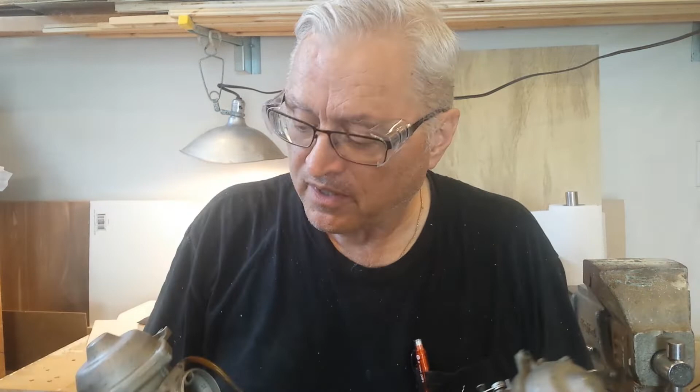As you may have guessed from the title, I'm going to tear into these Bing carburetors off of my Rotax 912. They're due. I think Rotax has had problems with floats sinking. These aren't supposed to be the floats that were in the service bulletins, but I'm seeing some fuel staining and stuff, and plugs on one bank are a little black, so it's time.

And since I have a background in carburation, I thought I'd take the time to walk through how these carbs work, what the various pieces do, why somebody might do it that way, and as I tear it apart and see what I find. So there's going to be a lot of talking, so if that's not what you want, then sorry.

But I should also say that I'm not an A&P. I don't have any Rotax specific training, certification, anything like that. I'm just a dumb old mechanical engineer who used to do a lot of emissions work in the auto industry back in the olden days when cars really had carburetors. So with that, let's zoom in and get started.

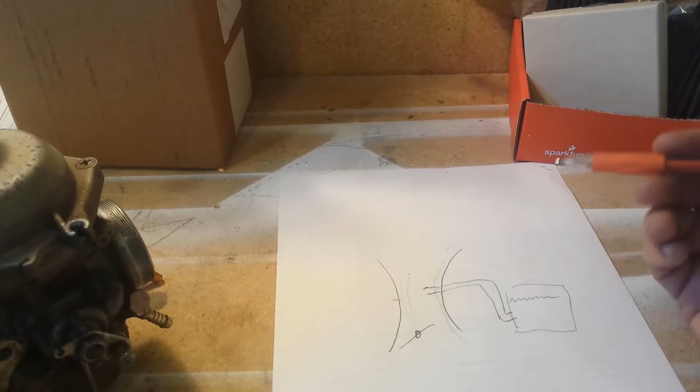Okay, real quick, in most carburetors you have a fixed venturi with a throttle plate down there and some kind of nozzle here, and as the air goes through this venturi or constriction, obviously the pressure drops as the air speeds up to get through there in accordance with Bernoulli's equation. That creates a vacuum or suction or depression, whatever word you want to use, and I'm going to use suction throughout this video. And that suction pulls fuel out of a reservoir over here, okay? And there's other variations, but that's probably the most typical carburetor design.

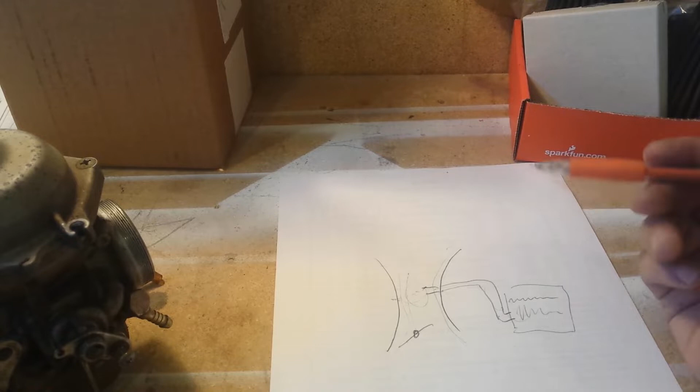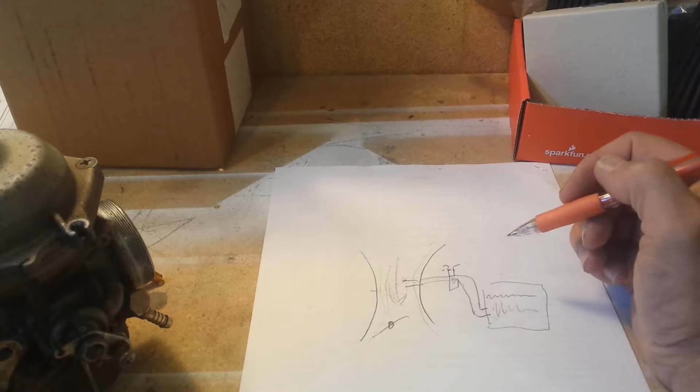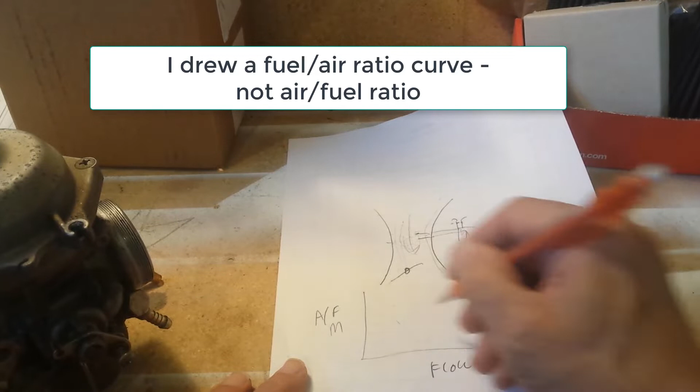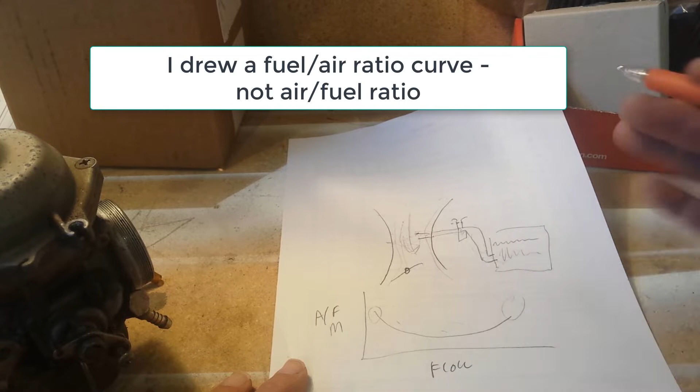The problems are, it's pretty nonlinear. You don't get a one-to-one correlation between the mass of air flowing and the fuel coming here, so you play games like putting little air bleeds and jets in and mixing tubes and all kinds of fun stuff. And I've got more than a few hours playing with that stuff. If you look at fuel-air ratio as a function of flow, you try to get a curve, something like this, where it's a little rich at idle, a bit richer at high loads for power, a little leaner in the middle for economy, and there's just a lot of screwing around with jets and mixing tubes and things. But this Bing takes a different approach.

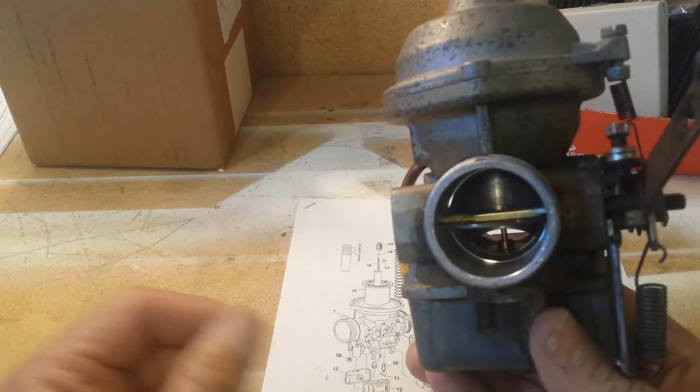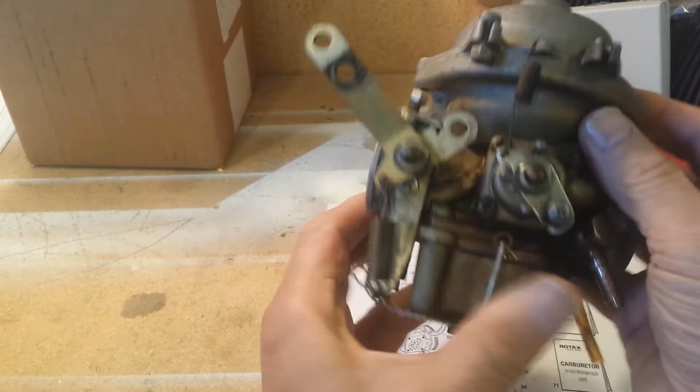It's a constant velocity carburetor, or constant depression, constant vacuum, different names. Right here, we're looking into the carburetor from the engine side, so the airflow is coming this way. This is the throttle plate, okay? So that would be idle, this would be wide open. And if we look at it from the other side, this is our venturi area here where the air comes through.

And what this does, if I can get my finger in here, okay, as the airflow goes up and in the small restriction you have a lot of vacuum, as the airflow goes up, the venturi moves up and down automatically to maintain a constant vacuum, constant suction, constant depression, constant velocity through the venturi area, okay? So that would be where it would be near idle, and as you get closer to wide open throttle, it's going to pull up all the way there.

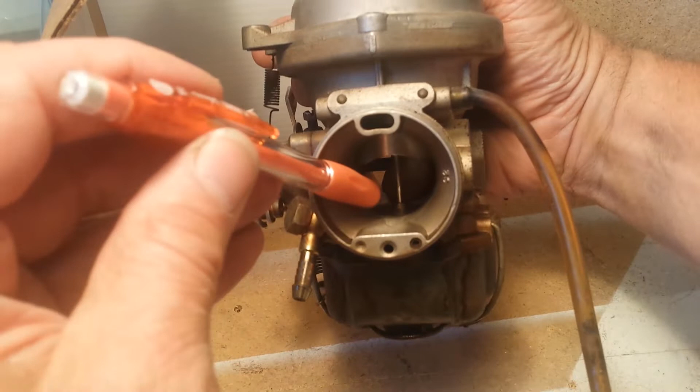So by maintaining a constant suction in that area right here, this little brass thing, that's where the fuel gets sucked up out of the float bowl underneath. And if it was a constant suction all the time, you'd expect a constant fuel flow through that orifice, right? But you can see this needle here has a taper, and as this moves up and down, the thickness of the needle going through that orifice changes, and by changing the taper in that needle, you can give it more fuel when the slide is up, and reduce the amount of fuel at idle when the slide is further down, okay? So we'll tear into that and see what things look like in just a minute.

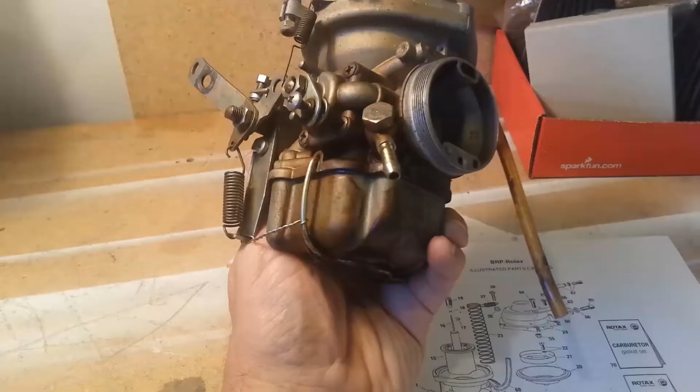I think I'm going to start with a float bowl. I'm going to weigh the floats and see if I suspect these floats have gotten heavy, but we'll see. Okay, so this is the float bowl. Normally it's sitting like this. Fuel is held at a certain level in here. This is the fuel inlet right there. So we'll cut the safety wire here.

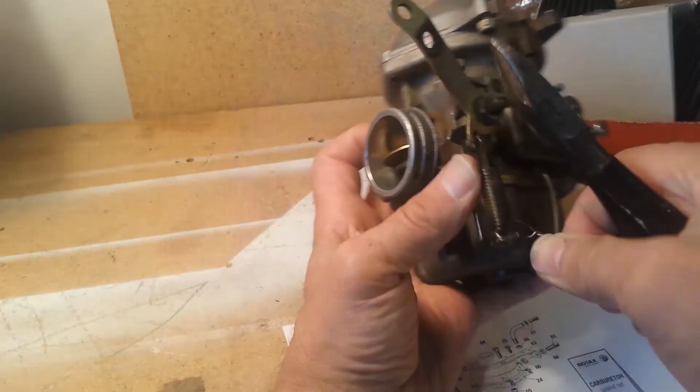Come on, it can't be that hard. There. This should just, and there's probably fuel in the bottom still, but it's just a snap, and I'll just pop it right out to get it out of my way. And there's the float bowl. No, there's no fuel in it.

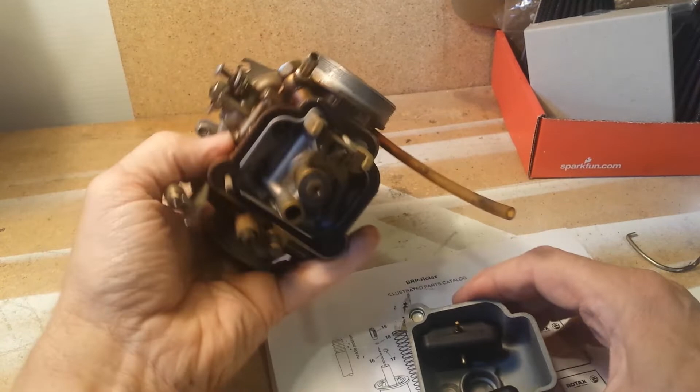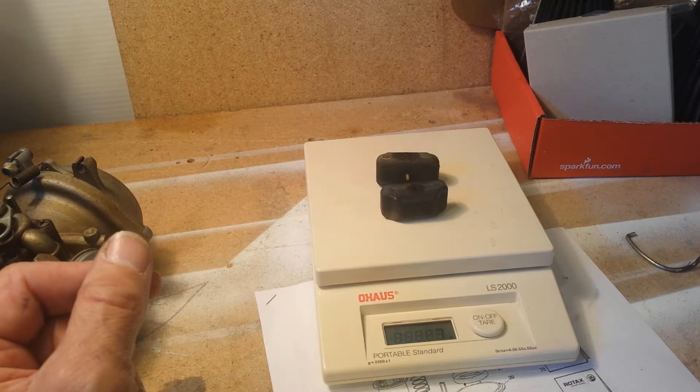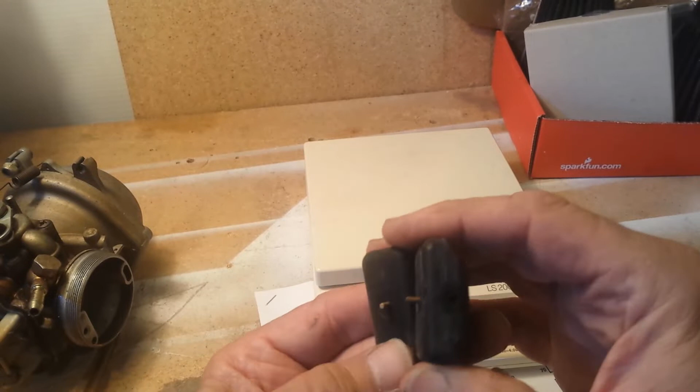Okay. And these are the floats, okay? So as they go up and down, when this bowl fills up, they'll go up and down. And we can weigh those. Rotax wants to use a scale with a 1/10 of a gram resolution. This one only weighs to the nearest half a gram. I'm seeing 7 grams, so they're not horribly overweight. I think 7 grams is a limit, but they could be a tenth or two above. Not very clean for...

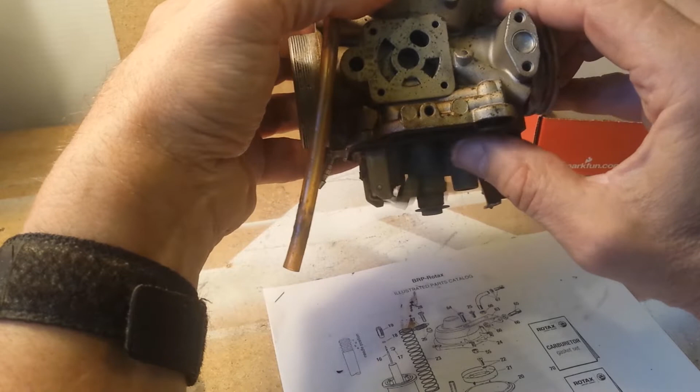But what those floats do, and this is upside down, is as the level of fuel rises, okay? Let me do it right side up. As the level of fuel rises, it lifts this up, which presses on, oh, gasket's not in good shape. Well, that could be part of the fuel staining problem, okay? There's a needle under here. I'll pull that out in a second. But as the fuel level rises, it presses on that, and that needle closes the fuel inlet here, to shut the fuel off from getting into the bowl. So it will maintain a constant level inside this bowl, and by having a constant level in here, you get a better control over the flow through this jet right here. This is the jet that goes up through that needle on the inside that we saw earlier.

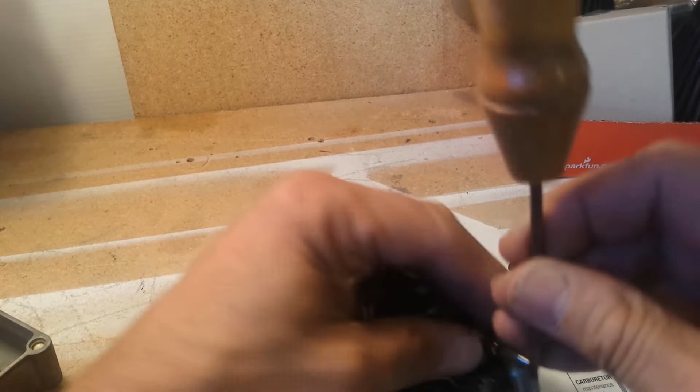To get this out, there's a pin here, and you probably can't see it, but that end has got some serrations on it. It goes in one way, it comes out one way. Ideally, you'd have a nice fine pin punch. Shouldn't take much to pop it loose and pull it out. There we go. And that, oops, comes out. There's a little retaining clip on here that holds, it's supposed to go through the hole in this.

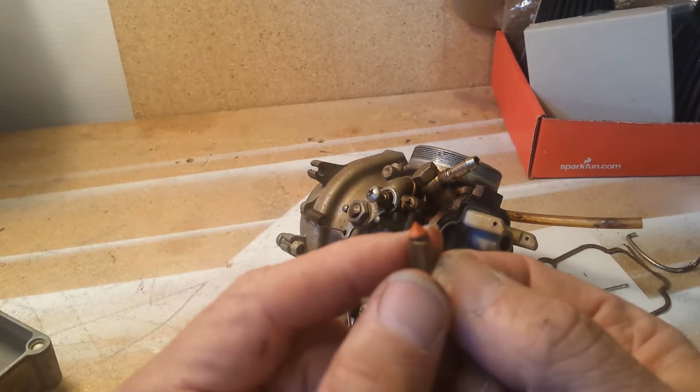This is the valve that, when it's pushed up by the floats, shuts the fuel off. Doesn't look too bad to me. You know, you can see a little bit of wear, and on the other end there's this plunger, and in the service instructions they talk about inspecting that to make sure it isn't worn and sticking out too much, but I'm going to replace it. Now, where'd that little clip go? There it is. It's little parts like this that get lost way too easy. Okay, I'll put that through there, put that on there so it doesn't get lost. I will replace all of that stuff.

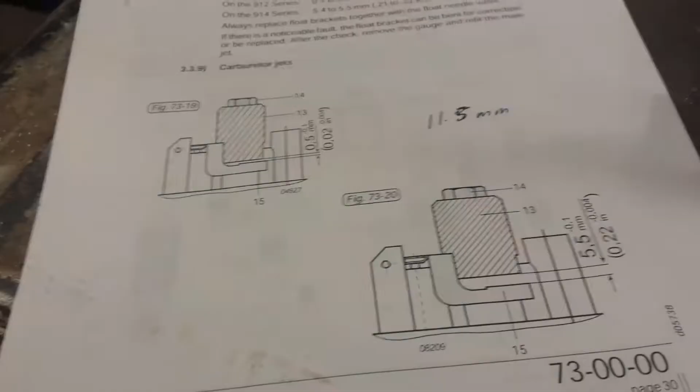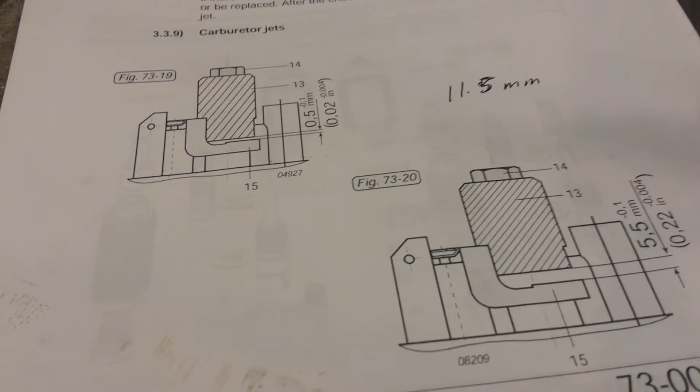Okay, one more fun fact. To set the float level, excuse the shaking, I'm hand holding the camera, they want you to use this gauge here. The part number of the gauge is not on this page. It's near the front of the manual under the special tools. It's $80. It's just a piece of metal with a hole in it. And all it does is it measures down from the, essentially screw it into the casting in place of the main jet and measure. Yeah, I didn't order one. Maybe I would have if I'd thought of it, but I didn't.

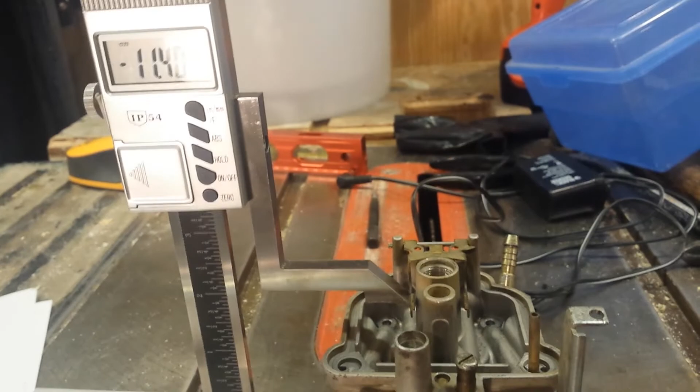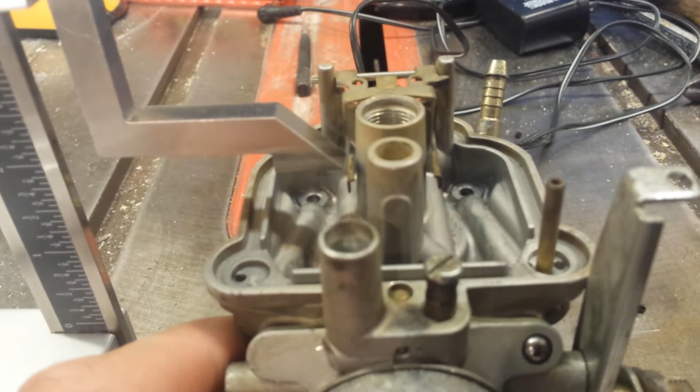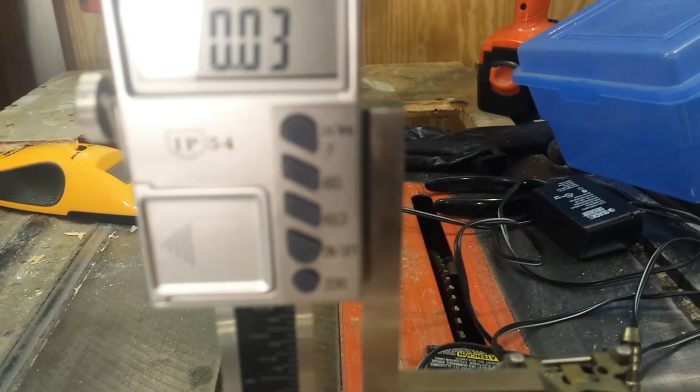So, I've got the carburetor set up here. I got a digital height gauge, and the reason I'm hand holding it is I can't get it in close enough on anything convenient. And I've tried 2 different float arm brackets, okay? And I've tried both of the needles in here and one of the new needles, and there's variations, and what I can do is just slide this in. So I zero the height gauge up here. Okay, so that's off by 0.03 millimeters. I've been moving stuff around. Let me re-zero that. 0.03 millimeters.

So I've been screwing around here. And if I bring this down, it's hard to tell exactly when it touches. You saw I went too far. Come on, focus, stupid thing. I decided not to focus. There, now it's focused. Explain that to me. So that's a 12.7. You can see it coming up. And there it's clear. And if I bring this one down, it's touching 11.5.

Somewhere right around 11.4 is where this particular one, you can see it's touching there. As I slide this in, you can see it move, so it's touching, right? So that one is a little less than 11.38. And I've checked both sides.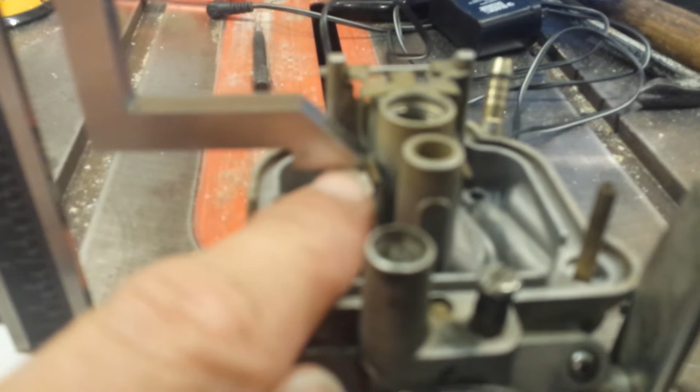My best guess, based on all the measurements I've taken, is 11.5 millimeters from this surface to here. And certainly if I check the new ones when I reassemble, I'm going to be closer than as close as I am now, because that's 11.38 and it's touching.

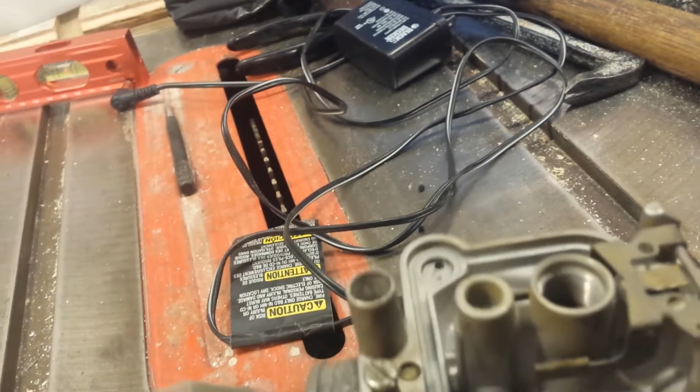If I slide the carb around, that is not touching, and I'm kind of assuming 11.52. I don't think that one's touching at 11.5, and I can check my zero in a second. 11.55. So anyhow, that's my best guess at a number.

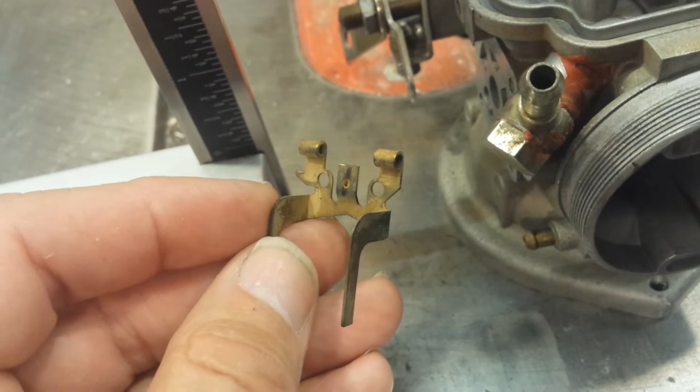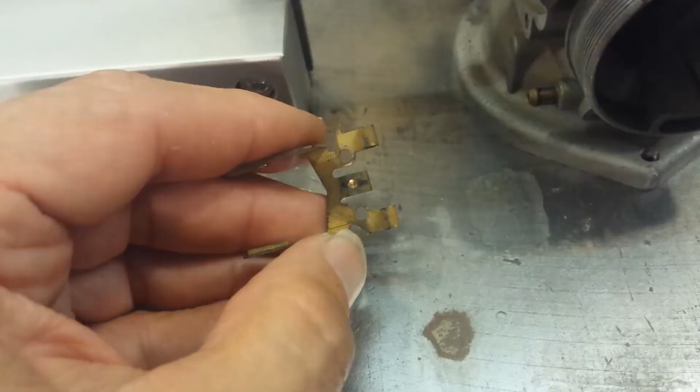I'll also point out, okay, this is the other float arm, and you can see the worn spot. I was kind of feeling it with my pen, those lines, but you can actually feel that dimple, and that's going to affect the number because you've got quite a bit of leverage. If you compare the distance from the pivot arm to that little dimple out to here, that's going to magnify that wear quite a bit.

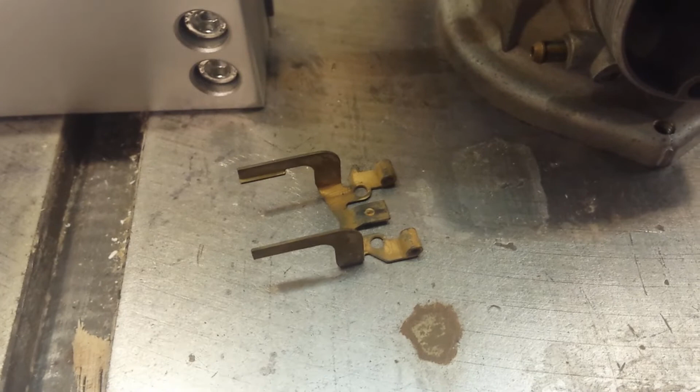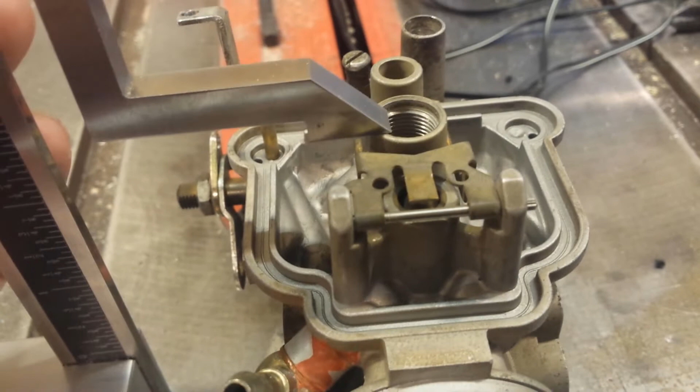So my thinking is if I check this and I'm in the vicinity of 11.5 millimeters down from right up here, and that comes back to 0, I'm certainly not far off from where these carbs are operating today. Whether that's the correct setting or whether somebody's bent something up in here, I can't tell you, but it's reasonably consistent with both sets of float brackets, both float needles, and I even stuck one of the new needles in there. So that's the best I've got to go on.

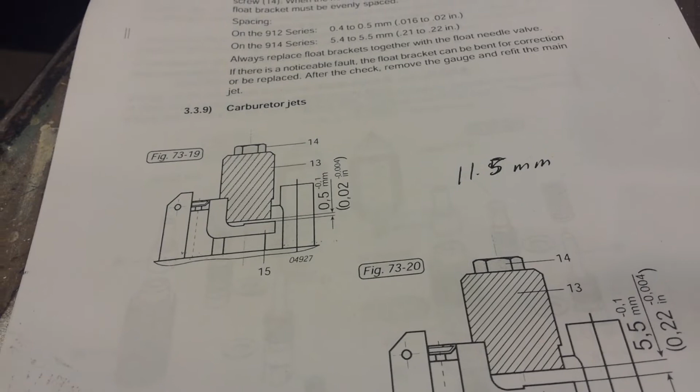If anybody has the dimensions for this tool, I'll try to put the number on screen. Particularly the distance between the bottom of the tool and, I assume, a flat surface inside here that sits on top of the main jet housing. It'd be a nice dimension to have. If you've got the tool and wouldn't mind measuring and making a comment, that'd be pretty cool. I'd appreciate that, and even if it's too late for me, help somebody else. So rather than my number, which is shaky at best, anyhow, moving on.

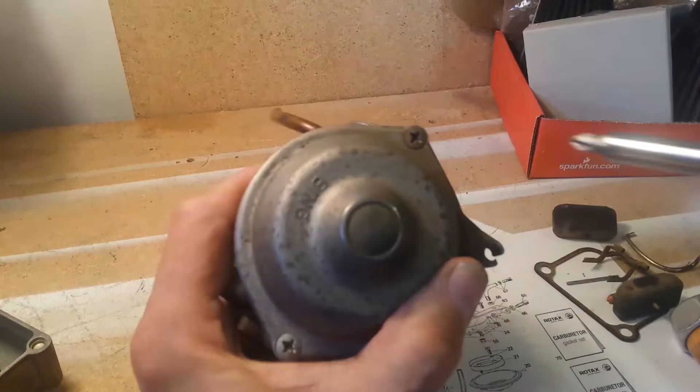That was tighter than I would have liked. Okay, I'm going to have to hold this better. Okay, so I clamped it in the vise like this with two blocks of wood so I didn't damage anything, and with the throttle partly closed. I was careful.

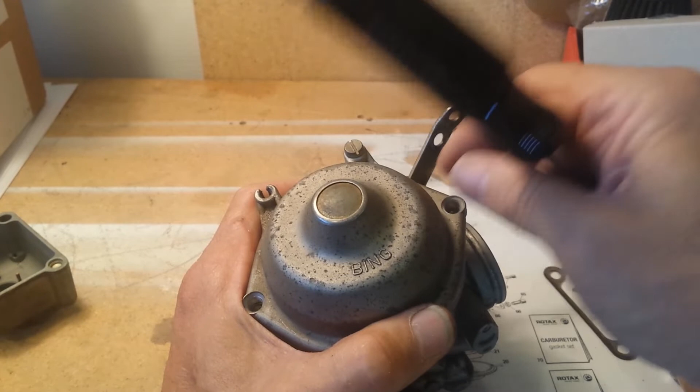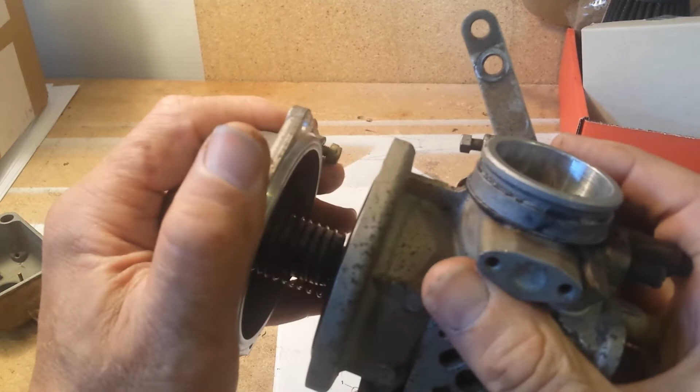It's the thing with steel screws in this die-cast material. I like to put either anti-seize or Loctite. Doesn't matter which, but either one will reduce the corrosion, and you've got a better chance of getting things apart easily. Oh, I've got to take the spring off. Okay, slide that out. So this is the top, nothing much exciting there.

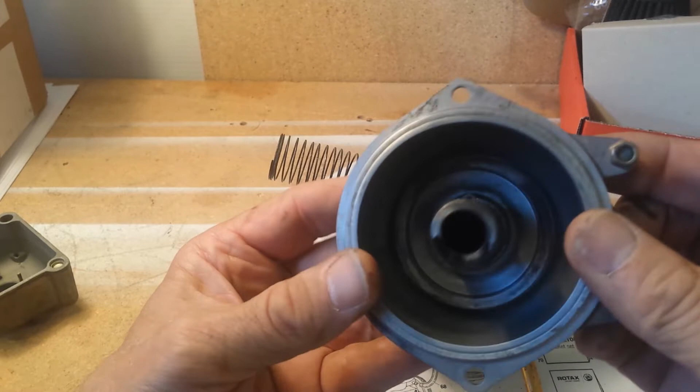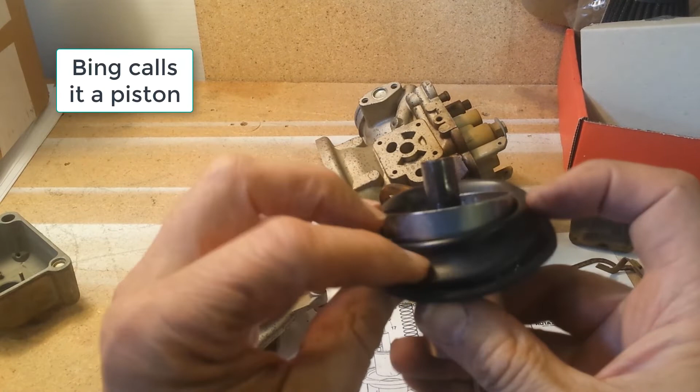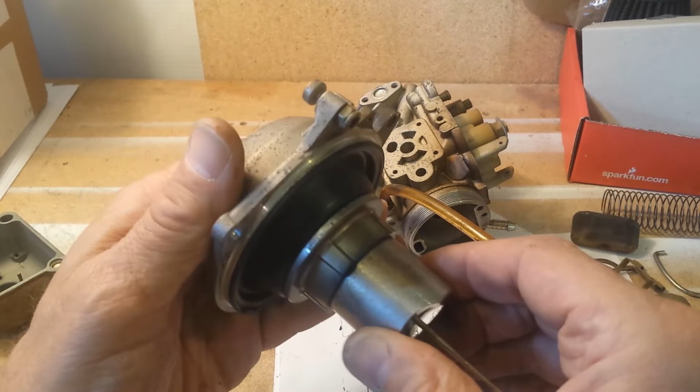So there's a spring here, and this is the slide that goes up and down. There's a diaphragm here, and I can see the holes down the bottom. The vacuum in that venturi area comes through those holes and is applied to the top of this diaphragm. As the vacuum gets higher, it tends to slide it up, right? It becomes a balancing act between the suction on top, the force of the spring, and the weight of this whole assembly due to gravity.

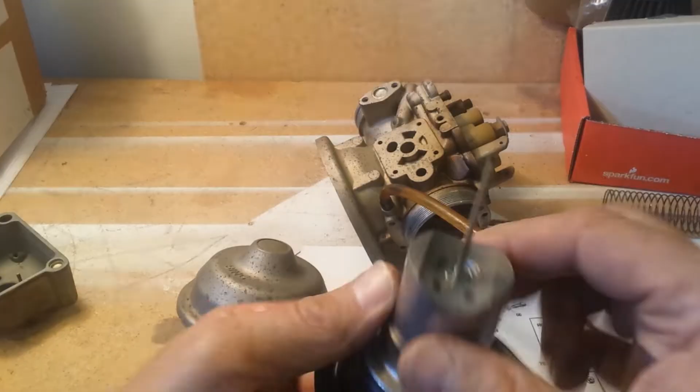This is what vents the underside of that diaphragm, by the way, and keeps it at the air inlet pressure. And this is that tapered needle that does the metering. You should be able to see the taper even on the screen. The more you taper it, the faster the fuel changes as you lift this in and out. So getting that taper right determines how the fuel ratio changes with position. And this whole needle can also move up and down in the assembly.

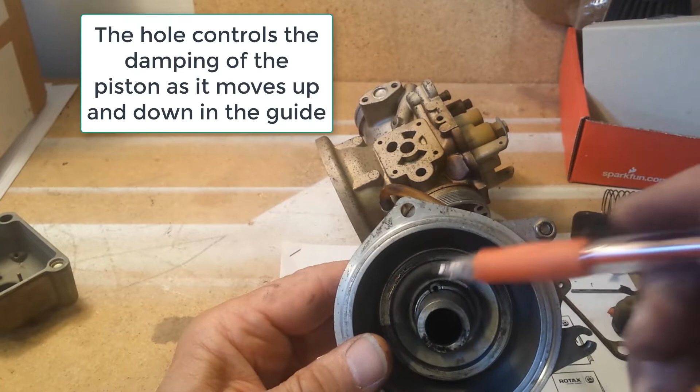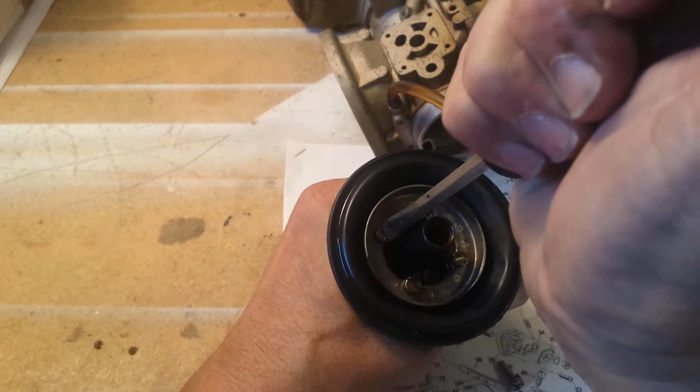Now this does have a hole right here. There we go, now you can see it, that hole passage right there. I'm not sure what that's for. Have to think on that. So removing these screws should remove this metal ring, which will let me replace the diaphragm.

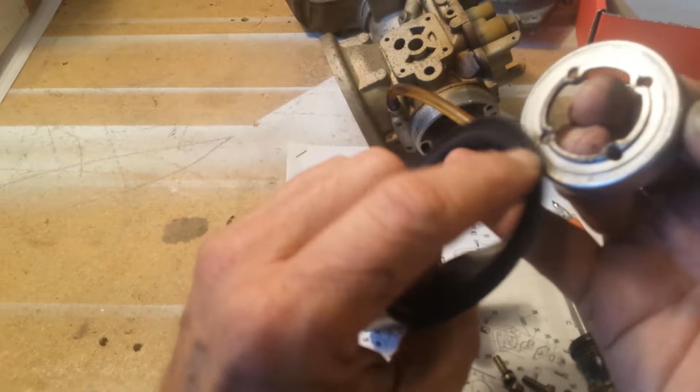That's the diaphragm. Little ridge here fits into that groove right there. Pretty groovy, eh? Now down inside here, can I get the light? You can see a screw head there. If I pull that, that's here on the exploded diagram.

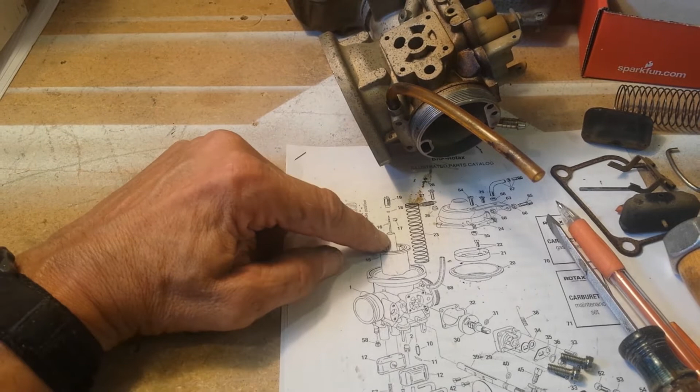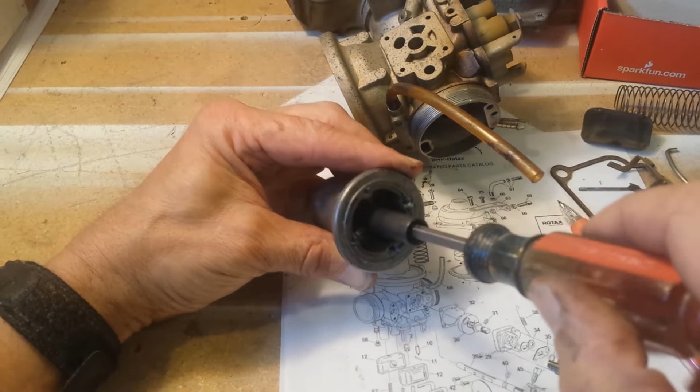You can see that's that piece right there, and that retains the needle here. This is the needle. Of course you're operating more by feel than anything else. There we go. Okay, so I can set this back here. So there's the needle, and this holds it down. And there's a clip on the needle.

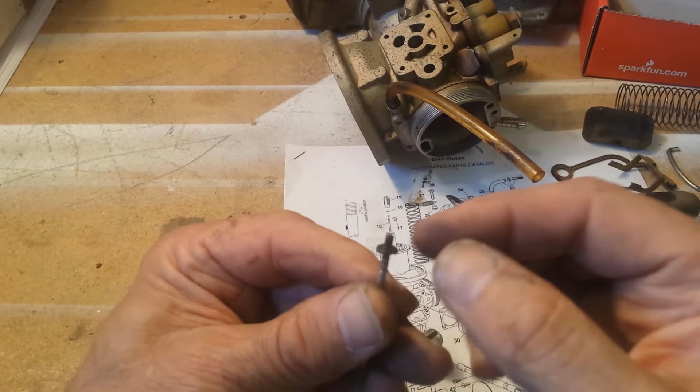I'm just looking, sorry. There's a clip and a little rubber ring, and the clip is in the 4th notch up. So if I moved that clip down a notch, it would lift this needle up relative to the jet and just make it richer everywhere. But I'm not going to be messing with that part of it.

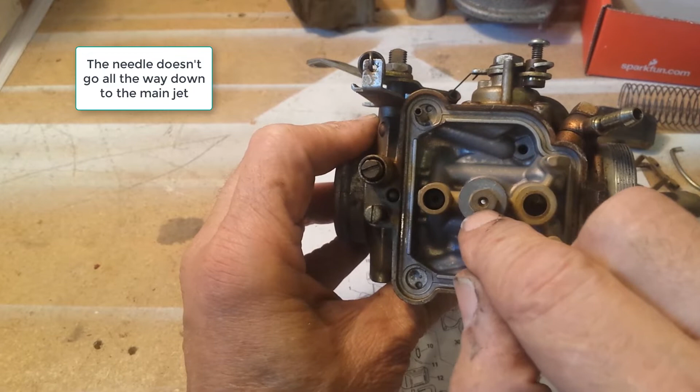So as we look from the top, let's try looking this way. We're looking up from the bottom, and you can see the light shining through this hole here. This is the main metering system. This is where that needle stuck into, and that needle went into here.

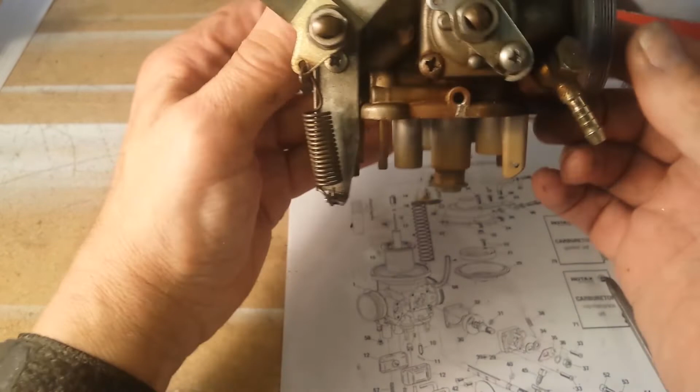As it went up and down, that changed the effective area. You can see this orifice here, or jet, is where the needle went into, and as that went up and down, that changed the effective area, or the annulus, between the needle and that jet to control the ratio of fuel and air, the mixture. And that hole, if you get the light right here, you can see it goes all the way through, and this is the bottom of the carb, and it comes all the way down here through the main jet, and this is where you would suck the fuel up. So that's the main metering system.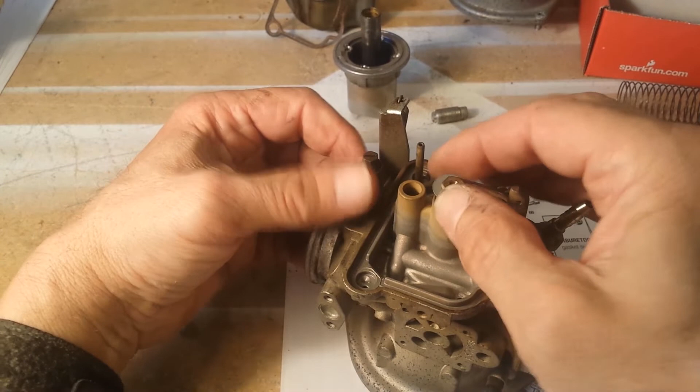Let me get some more tools and we'll pull the main jet. If we look here, this is where the fuel comes into the carburetor. That little orifice down in there is where that needle hit. This plunger hit that orifice down there that you can just see, or that little hole, to shut the fuel off when the fuel level gets high enough in the float bowl. So this is the main jet here, I believe, that controls the flow of fuel in conjunction with that needle. And it's just a little orifice there.

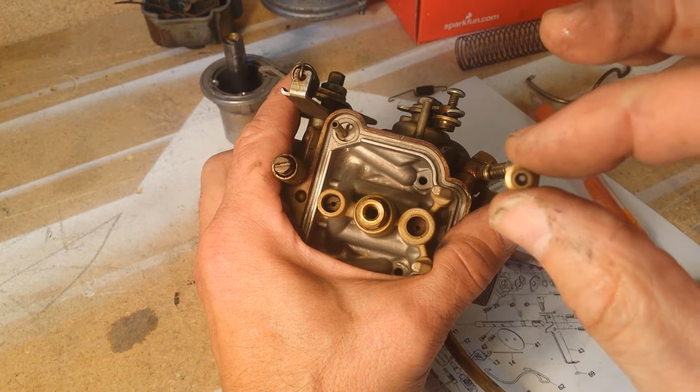Not a good idea to stick things like drills down those holes. Put that right there. So that's the main jet screws into there, and that's just, I'm going to call it an adapter. Get that into there. And this just pops out, and that is the jet that the needle goes into. Okay, final part of the main metering system, main fuel system. You have this hole right here that goes straight back in and around where that jet was.

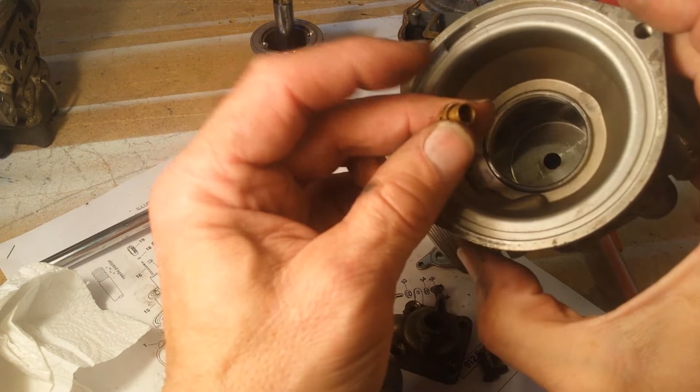And in here, this was up inside there. And you can see it has holes in the side. So this lets air come in here and flow up into that area where the suction is and mix with the fuel as it's bubbling out through the jet to make air-fuel emulsion, or bubbly, or whatever.

There's the idea that the fuel gets sprayed into the carburetor and atomizes in the carburetor. And if you've ever peered inside a carburetor as they're running, you find that the fuel is blobby, drippy, splattery globs. Some of it evaporates. Most of it ends up as liquid on the throttle plates, and a lot of it ends up as liquid on the walls of the intake manifold. But getting some air and fuel mixing right as it's coming into the venturi area does help break it up and evaporate it faster.

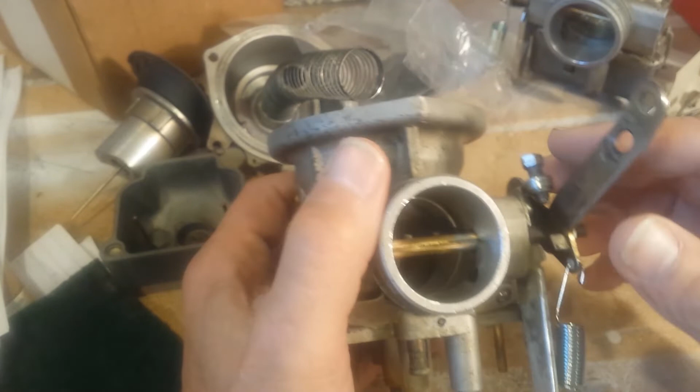Okay, let's talk about the idle system. We talked about the slide and the needle going up and down. Well, when the throttle is closed, there's just not enough airflow for that system to work, so you need a separate system, the idle system, and let's walk through that. This is the idle jet. Let me lefty-loosey that.

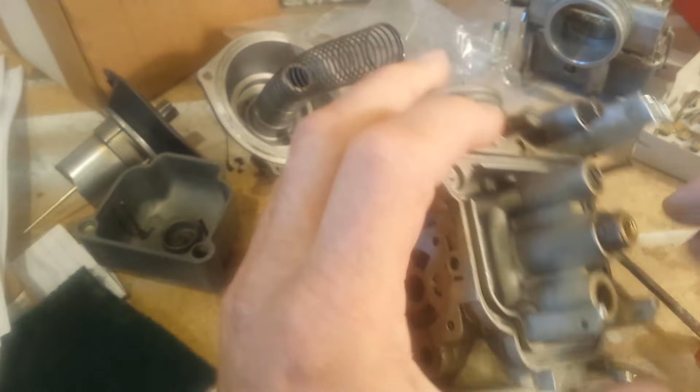So fuel comes in the bottom of this jet. There's a little hole, and then it comes out the top. And you'll notice there's a ring of holes around the outside.

Again, right here, this orifice comes through and it goes along here and comes in to there to supply air. So there's air coming in the side, fuel coming in the bottom, and then you get this fuel-air mixture, they call it an emulsion, coming out the top of this jet. So the air bleed comes in this side, and the fuel goes down this side, and then this isn't drilled. Sometimes this stuff is just, wow, who thought of this, you know?

And looking in here, that hole right there is where the fuel comes out, that little small one, not this bigger one on the side. That little small one is the idle outlet, okay? And then under here, this screw, normally when I take this out, I turn it in first and count the turns, but I already had it out, and it was in about a turn and a half, a little over a turn and a half. And that's where it is now. So that's the idle mixture screw.

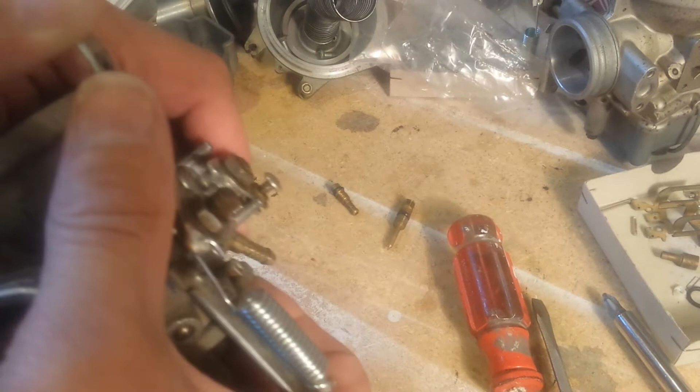You can see it's got that tapered tip, and it goes in an orifice, and as you screw it in, it constricts the flow. As you screw it out, it opens it up, so you get more of the fuel or air-fuel emulsion into the carburetor, and you can adjust the mixture, okay? Nothing super duper, right? But there's one more thing. There's a spring underneath this to keep it from turning.

Okay. Now down here in the bottom, you can see two little holes right there. See them? And one is getting covered up and the other is getting covered up, right? These are transfer ports, okay? These also go to that fuel passage and the fuel-air passage. They just go right in the top. And when the throttle is closed, you can see those holes are covered up.

They're on the far side of the throttle, and they're going to be closer to inlet pressure than to the suction on the engine side, right? Because that's how this idle circuit works. When the throttle's closed, the engine's trying to suck air out of the manifold, and you get a low pressure here, low manifold pressure, a lot of suction, and that's what sucks the fuel through that idle system, is that suction from the engine.

But as you open this up and you start to uncover those holes, while they're on this side, behind the throttle plate, they're letting air into that idle system and reducing the amount of fuel by replacing some of it with air, right? So you get less fuel. And then as you open that up, now those holes appear on the suction side, on the low pressure side, on the engine side, and so they don't let air into there anymore. And now you get a more concentrated mix of fuel and air. You get more fuel. So as you open the throttle, the amount of fuel delivered increases instead of decreasing, because the vacuum's decreasing. So the amount of fuel slowly increases as that throttle moves and uncovers those ports.

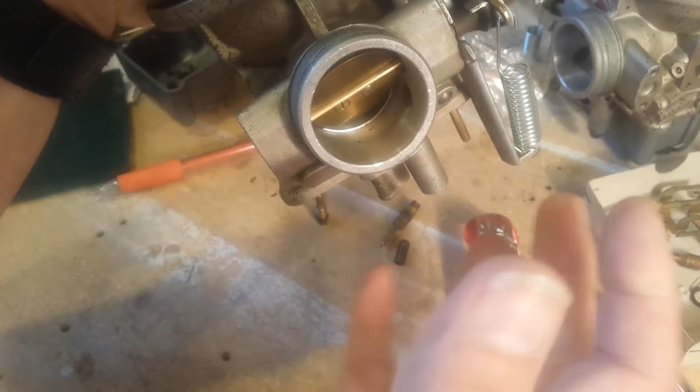It's genius. I mean, whoever came up with that idea was a flat-out genius. And you know, the average person looking at this carburetor, even if you handed it to them like this, would they even notice the holes? Would they appreciate the kind of inspiration that went into coming up with a setup like that? It's just amazing to me.

So anyhow, that's idle. Let's move on. But anyhow, so we'll be adjusting this to get the mixture right at idle when we get it back in the airplane. Back in the olden days when I did this sort of thing for a living, as an engineer, you had to wear a tie all the time, you know, so you're adjusting idles, working on a car under the hood with the engine running, wearing a tie. I mean, how stupid is that, you know? But that's the way it was.

And there's the spring that went with that. The spring just keeps it from turning by itself, okay? The throttle. Now the throttle, there is an O-ring in here, but these screws they're staked. You can see where they're squished. I'm not going to pull those out, right? There's just too much chance of screwing something up with very little potential benefit just to replace that one O-ring, and I don't think I'm having issues with leakage around this, so I'm leaving that alone.

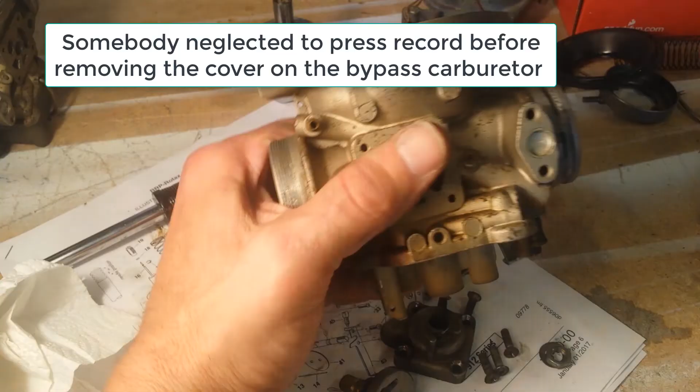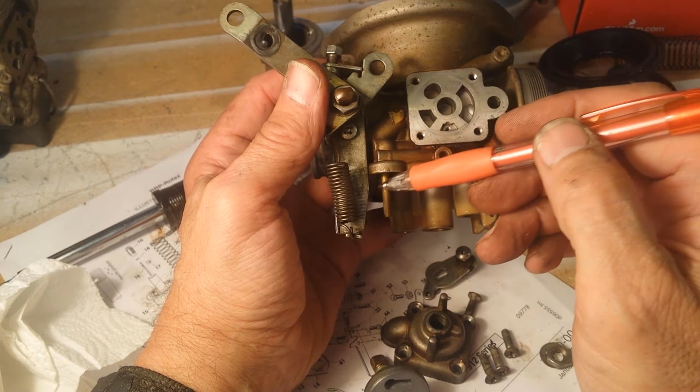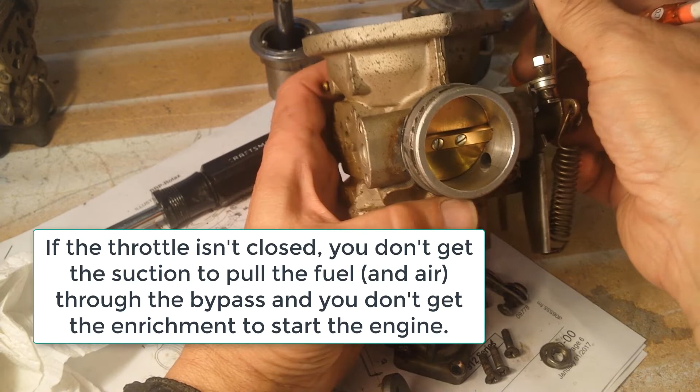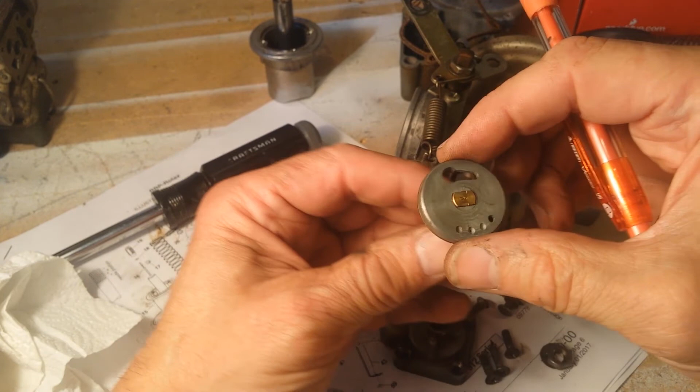Now I'll talk about the fuel starting carburetor. Okay, so the starting carburetor, or choke, it's not really a choke, lets air in here, comes out here. This little hole here is connected to that. That's the fuel getting sucked in there. And then this hole here comes over to here behind the throttle plate. And you can see with the throttle plate closed, this is the engine side. As the engine sucks, it's going to suck through. It's going to suck pretty hard on that, which sucks here, which sucks up the fuel, which sucks up the air. And then this normally sits

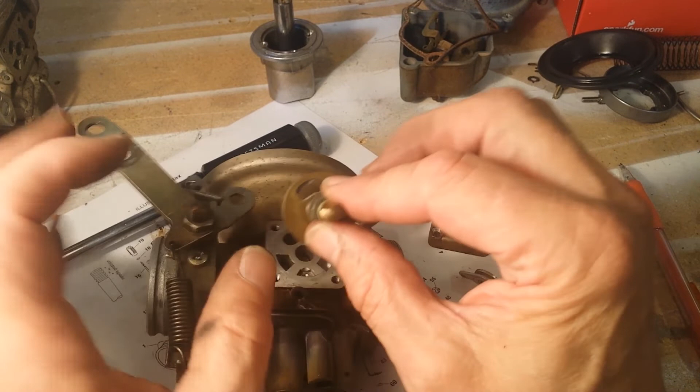So this sits here. You know, this is the housing on top of it. You're used to seeing that. This hole here lines up with that when the choke is on, okay, or when you're enabling the extra fuel. And then there's holes down here that line up with this, and a little passage behind this brass disc, which you can't see, and I'm not going to take this apart because I don't need to. So as you rotate this, you know, you have the enrichment turned off. Then when you rotate it here, you open that passage up and open this up to the fuel on the bottom, and that enriches your mixture for starting, okay? But again, you have to have the throttle closed to get the suction through there to make that whole thing work, okay?

Okay, now that it's apart, one thing I forgot to mention, sometimes I read, you know, like in discussion groups online, that this carburetor automatically compensates for altitude. No. Yes, it's a constant velocity. I think Bing likes constant depression. You know, constant vacuum, whatever term you want to use. But it's still the same concept in that you have the venturi creating the suction and the fuel coming through the metering jets, and the density of the air changes with altitude. The density of the fuel doesn't. It doesn't compensate for altitude. So I certainly don't find anything in any of the Rotax documentation, and I'm sure you won't either. But if you do, point me towards it, because prove me wrong.